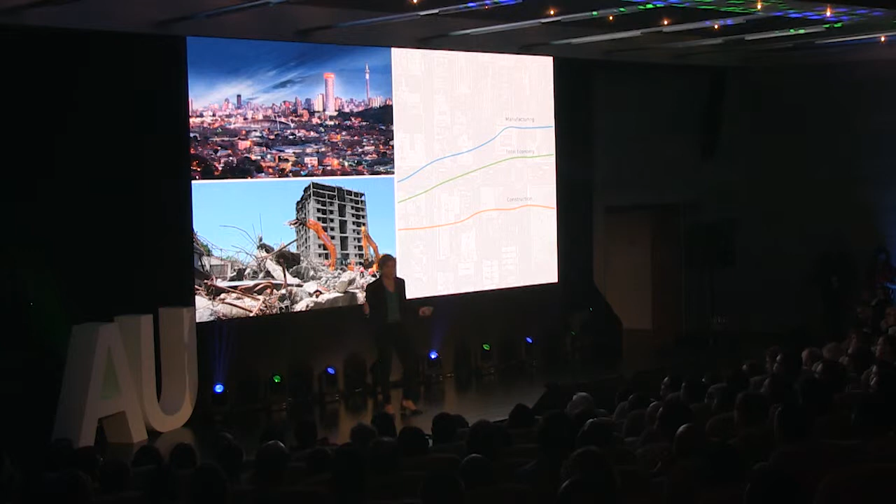So today we're going to talk about who's going to be designing that future and how it's going to be designed and built. So we heard about Van Wijnen. We heard about how this company is reimagining their business, embracing automation and generative design. And there's many other companies in the construction space that are also starting to embrace and take advantage of practices that were commonly found in the manufacturing sector.

So today, we're going to talk about the convergence of construction sites like you see here with manufacturing. And the good news is that as this convergence happens, our research is showing us that we'll increase productivity by 30%, being able to design and build more things, reduce waste by 90%, which has enormous cost savings, but we'll also be able to reduce injuries by a factor of 4. So we'll talk about how we're going to get to that future where we converge construction and manufacturing.

So imagine how you might change the way you think about design, engineering, and construction if what you're working on is built off-site, in a factory, where the components and modules are manufactured and assembled. As you watch this, imagine how your industry might change from the factory and then taken to the construction site for final installation, as you see here. Imagine how that might change your industry.

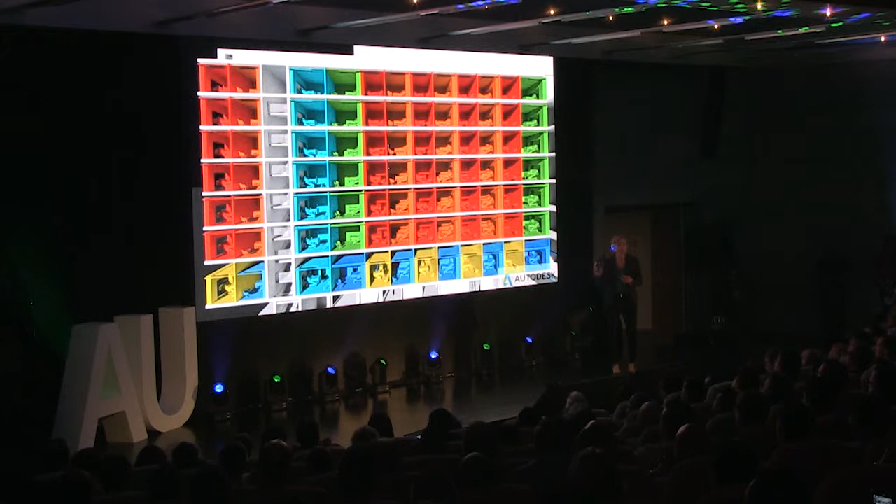And then the final step is to decompose the modules into multiple different elements. And these can either be purchased from a manufacturer or sent to production tools like Inventor, Fusion, Fusion Production, so that they can then be fabricated. Individual modules then can also be combined into bigger cross-discipline assemblies that hold the fabrication intelligence and the assembly instructions. So that's the future of design.

Now if we move to the factory, the AEC factory of the future, what will this look like? Maybe something like this. This is the design of a factory that's mass-producing concrete modules. Take a look. I like this example because just yesterday I was seeing this process in a very manual form in Kenya.

And according to our industry estimates, creating precast concrete yields 20% savings in concrete consumption and 30% savings in steel consumption. So very significant savings. And of course, these precast parts can also be disassembled, rearranged, and reused in other parts much more easily because of the nature of the construction process.

And here's that same factory in real life on a video, mass producing precast concrete modules. So this is a company called Greyform. They're based in Singapore. And by automating the production in a controlled factory environment, they can more accurately plan, procure, and improve the process as they go. They're also able to achieve greater quality, greater sustainability, and greater safety simply by automating this process. Pretty incredible.

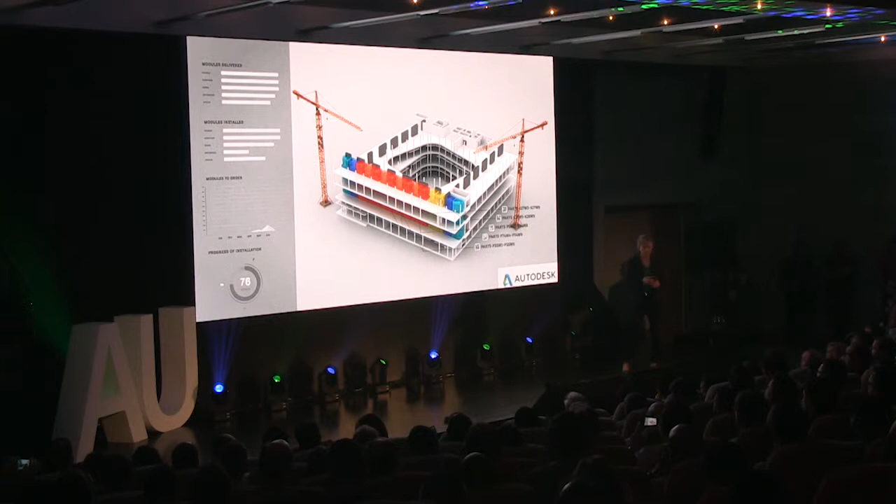And this automated job site means that data can flow seamlessly from the project through the project site for the very first time, which again drives greater efficiency, reduces the waste, and results in a better end product. Robots. Robots also have the ability to transform how we actually are installing buildings on site, helping us be more efficient and more accurate in the execution of our work.

And as you watch this, realize this isn't the realm of science fiction. This is the future that we're talking about that is right around the corner. Now take a look at this video. This is, of course, a robot laying bricks. This could be how we build tomorrow at scale.

Now, of course, this would mean that the way we do our work will change, right? And in the era of automation and robots, as my colleagues talked about, jobs will change. Some will go away, as has happened in the past, but new jobs will also be created. The future is about humans and machines interacting together, collaborating in new ways to design and make the future.

This is the world's first robotic drilling machine. It's 8 times faster than what a manual worker could do. This video is of Skanska, and they're using nLink's robotic drilling machine on a project in Sweden. They claim that it saves an incredible amount of time, but it's also performing hazardous work, so it's more safe for the people on the project.

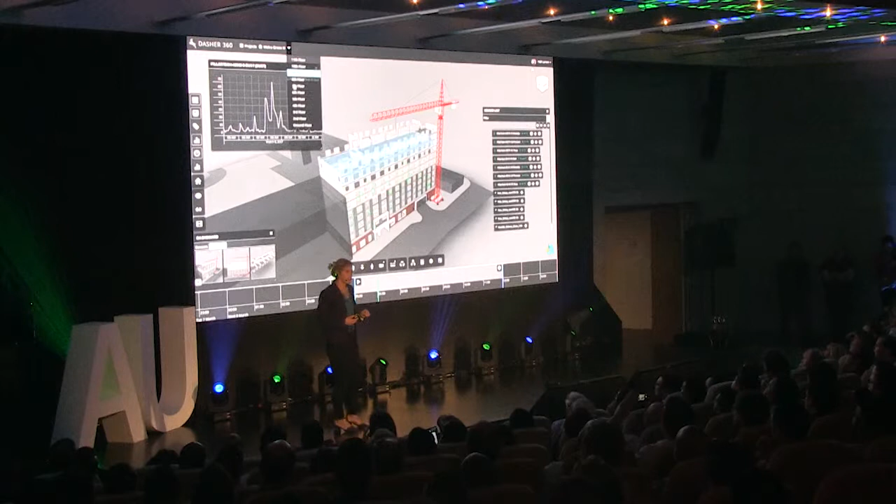Let's look at this example. This is Pillar Technologies. They're using sensors to detect problems at the construction site. So they have a visualization tool which helps understand which zones are safe or unsafe for workers at different times of the day and as the conditions change over time.

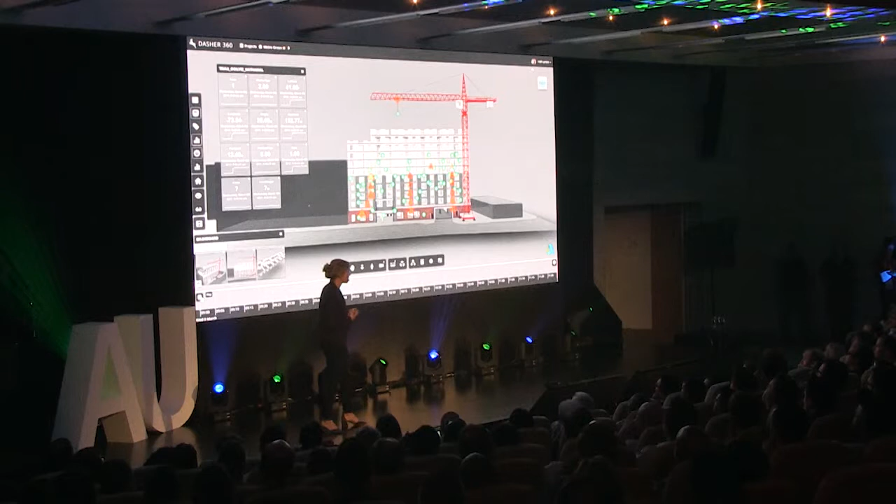Now, Autodesk is partnering with a firm called Triax Technologies, which is trying to improve the safety of workers at the construction site, with wearable sensors that the workers can wear that collect and transmit information throughout the day. This enables the team to respond to problems on the site that might need worker assistance or worker evacuation. And they're also using sensors on the cranes, which helps them understand the loads and also understand where it's safe for the workers to be.

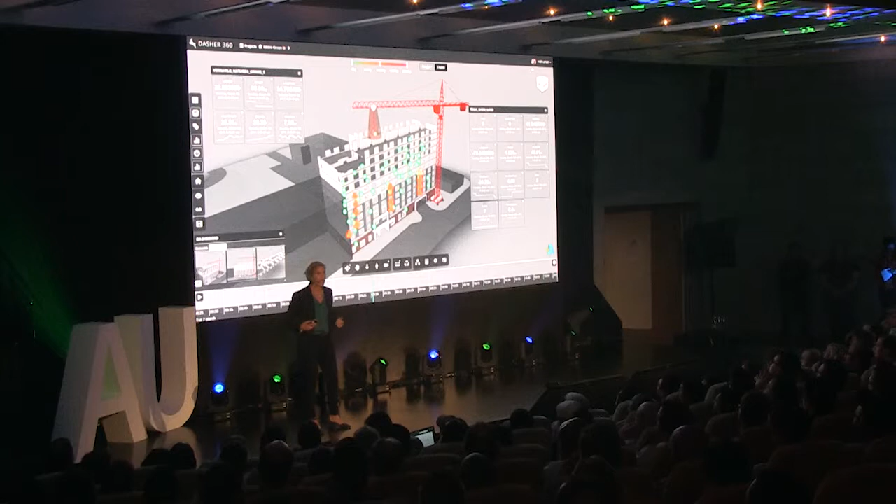As we think about the future and building more and more buildings, we need to think about designing buildings with fewer accidents. And with the power of BIM connected with sensors and data like we've talked about, we're able to design and build in a much more safe way going forward.

So what does this mean for you? As we move to this automated future, it begins with BIM. And when you add the power of the cloud to BIM, everything changes, opening the door to the automated technologies that we've been talking about today. We call this connected BIM. This is BIM plus the power of the cloud. And at Autodesk, our goal is to help put data at the center of everything that you're doing, to connect the digital and the physical aspects of each of your projects. So let me show you what this will look like.

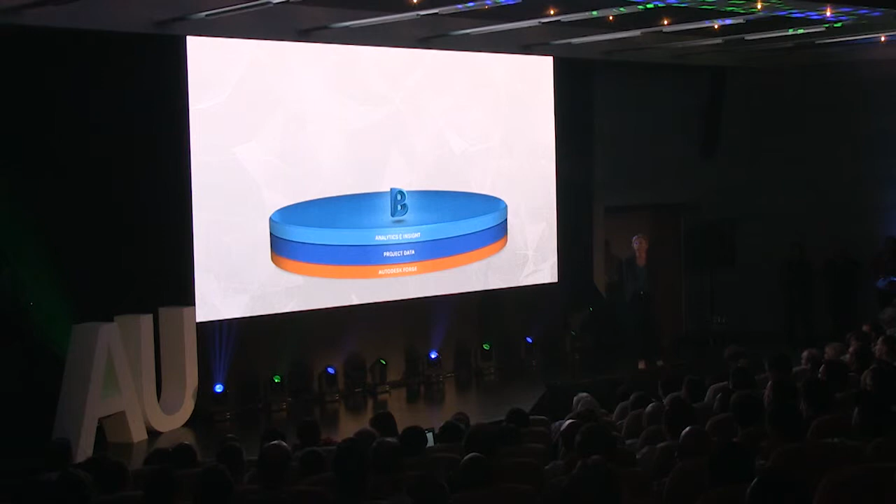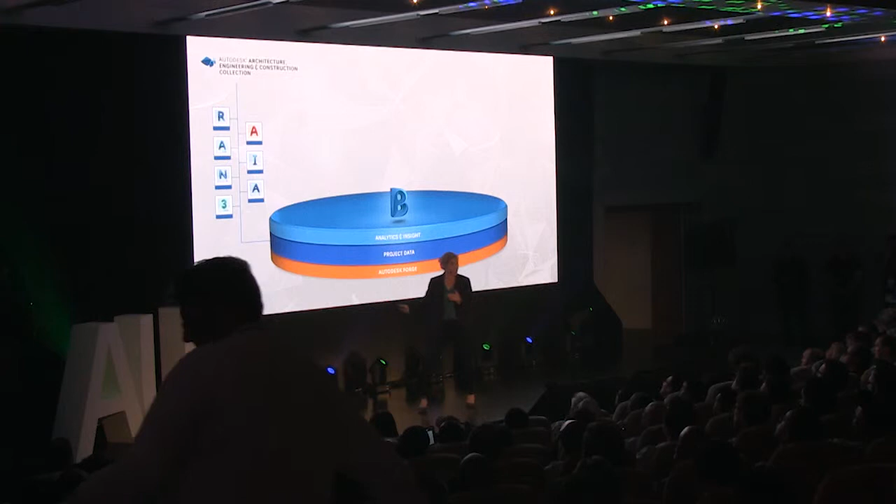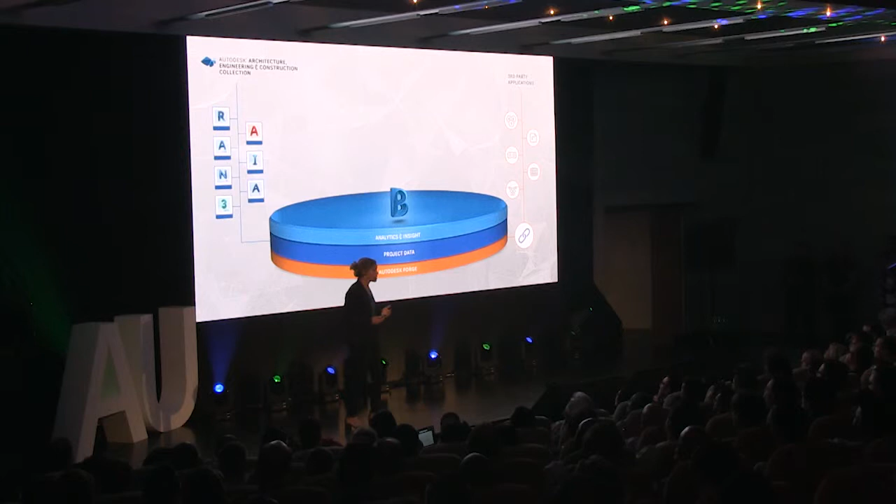This year, we launched the BIM 360 platform. This is a unified platform that connects data across the entire project lifecycle. So all of our authoring tools like Revit and AutoCAD, InfraWorks, and Civil 3D feed data into this platform. And because the platform is built on our developer platform, which we call Forge, third-party developers can also add data to the platform. Simulation data, cost, scheduling, IoT sensor data.

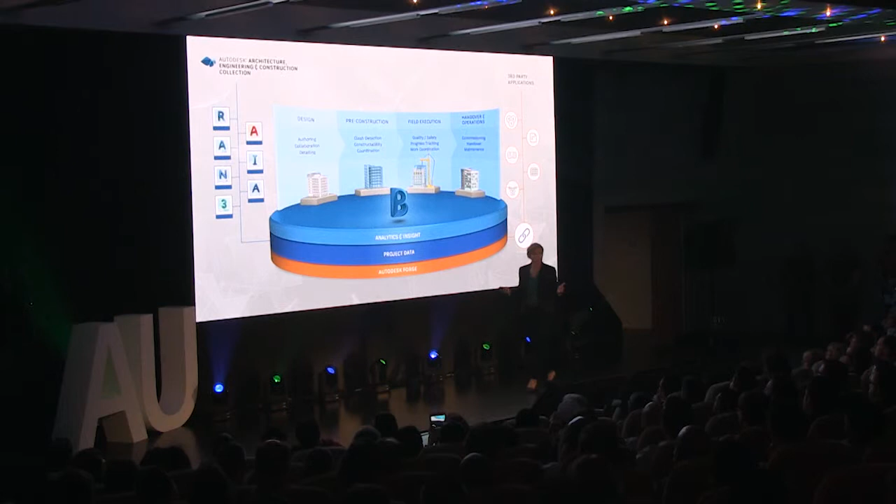And all of our processes, from design collaboration to pre-construction, field execution, and handover and operations, now can run on the single platform. BIM 360 is at the center of the connected BIM process. So no matter who you are, what work you do, or where you are in the process, you can connect to the data through the single platform. And this single platform opens the door to many of the automated technologies that we've been talking about today.

So I want to leave you with this. Think about how robots and automation first will transform our whole industry, the AEC industry. But then think about how robots and automation might transform your business, like it did with Van Wijnen. Think about what you might decide to design and build in this new future, helping you address opportunities and challenges in a radically new way.

Think about the skylines of Lagos, Nairobi, Johannesburg, or cities that haven't even been built yet. How will those skylines be different as a result of the technologies that we've talked about? And perhaps most importantly, how will each of you help us build beautiful, sustainable, smart cities of the future that are healthy for billions of people? This is your opportunity to solve, and we want to help you seize it.